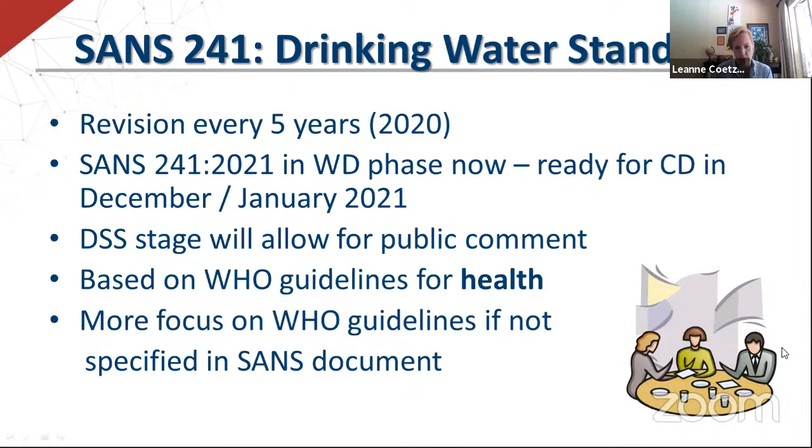As we all know, small water treatment systems are generally higher risk because things go wrong quicker at smaller treatment systems. So this is where you would point out your potential hazards and risks. Based on those risks and hazards, you would draw up a system-specific water quality monitoring program specific to that particular wastewater or drinking water treatment plant.

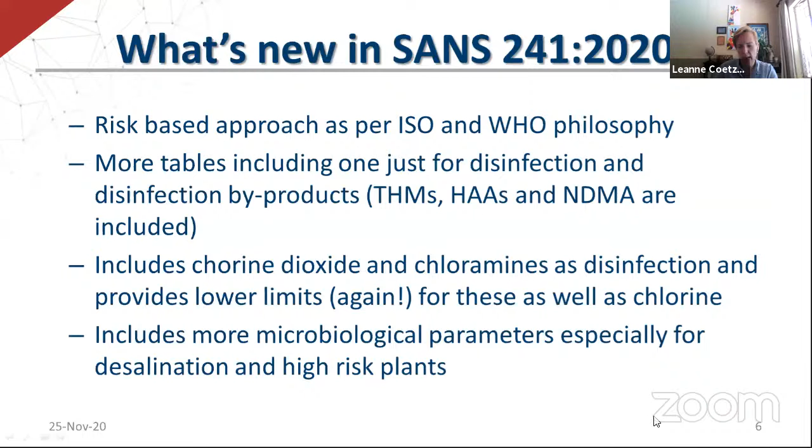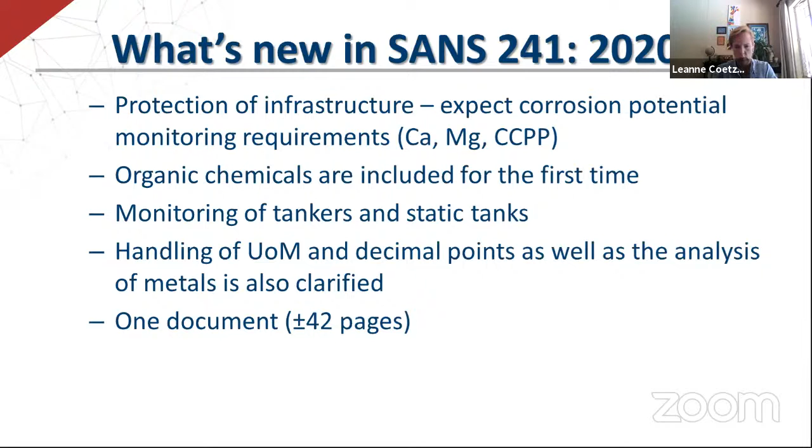So we don't have SANS Part 1 and Part 2 anymore. It's just going to be SANS 241 2021. It's about 42 pages at the moment, but as I said, it's still going to committee draft now, so we will see if it gets longer or shorter.

So in conclusion, I would ask you that when you see the new document, please don't just look at the tables, read the whole document. It has been extensively revised. Some of the people who have worked very hard on this document are in this webinar today, so thank you for them. And please, it's not just only about the tables, it's about the whole document, the whole holistic process.

And when we are ready to give you the draft standard, please make yourselves available for public comment. We will try and put this out on social media and on various websites so that you will be able to know when the draft standard is out for comment. And we would appreciate any comments coming from the public. So with that, I thank you very much.

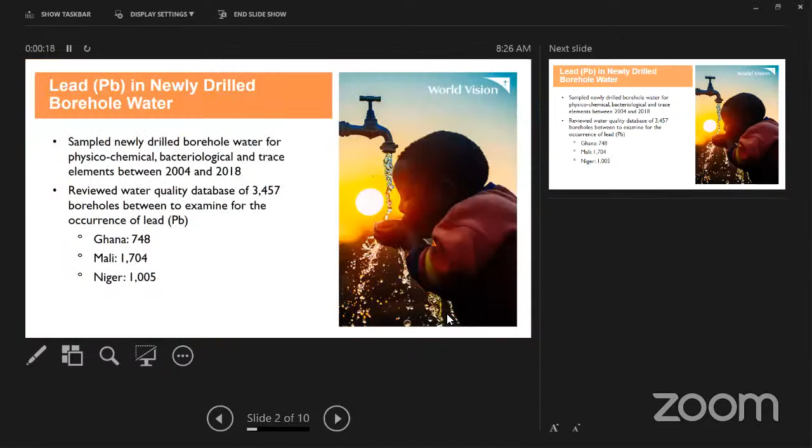In our experience as an NGO, I work for World Vision. We provide water to communities since 2003 as a large program. Today, we are reaching about 50 countries with our business plan, but globally, we are reaching more than 82 countries. But the experience I'm going to share today is about what we did in West Africa region, as West Africa has been the larger geographic area where we work for more than 20 years.

We realized that water quality issues are very critical in the provision of safe water. And because of that, we conducted some water quality analysis, including physical, chemical, bacteriological test, but also trace metal test. We decided to sample our new drilling boreholes between 2004 and 2018 to ascertain that water we provide to communities are of good quality.

It happened that 2 years ago, we started reviewing our water quality database for about 3,400 wells to ascertain that we are not having some occurrence of lead. We tested samples in Ghana, Mali, and Niger.

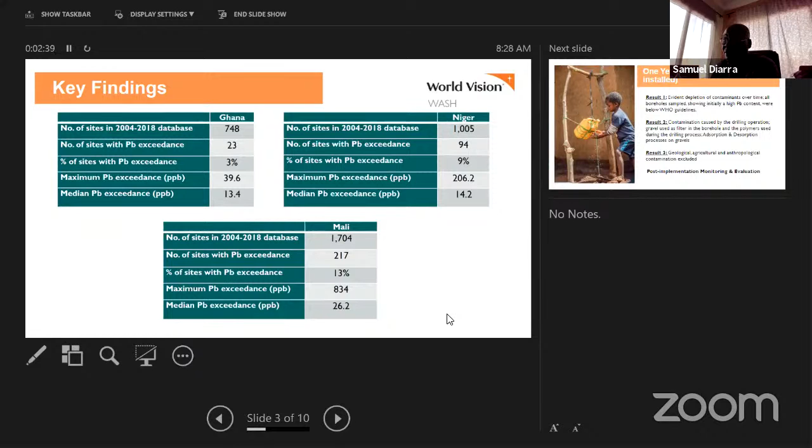Then when we realized that those boreholes have exceedances, we decided actually to not equip the wells. And we decided to conduct a post-drilling monitoring 1 year after. And we realized that most of the boreholes have some kind of depletion in the content of lead. And this was after a 12 months period.

We did some additional investigation in the field, and that investigation pointed out that the contamination is caused by drilling operation, mainly gravel used as filters, but also additives like polymers during the drilling process. The gravel issue is about adsorption and desorption process.

Mr. Diarra, you are on mute.

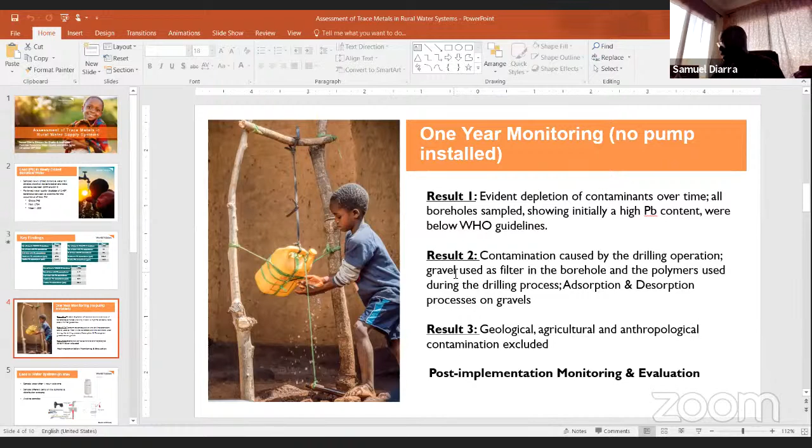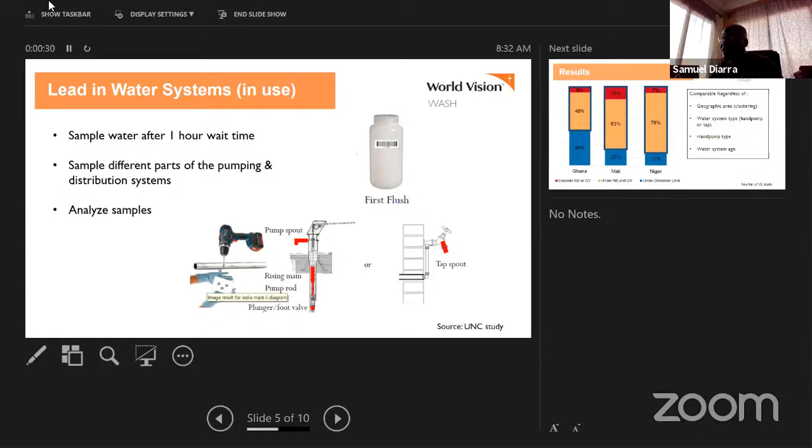With that said, we realized as well that there is also some component of lead coming out of the borehole after installing the pumping system, whether hand pump or submersible pump. We tested all of them by sampling water with a 1 hour waiting time before sampling, and we also sampled different parts of the pumping and distribution system to analyze them. The result came out like this.

Then the study we conducted with UNC helped us understand some of the root causes. The first is about the drilling input, gravel, polymer, and any other material used to construct the facility. Why is that? It is about the quality of gravel, especially gravel collected from the riverbed, which is highly producing lead.

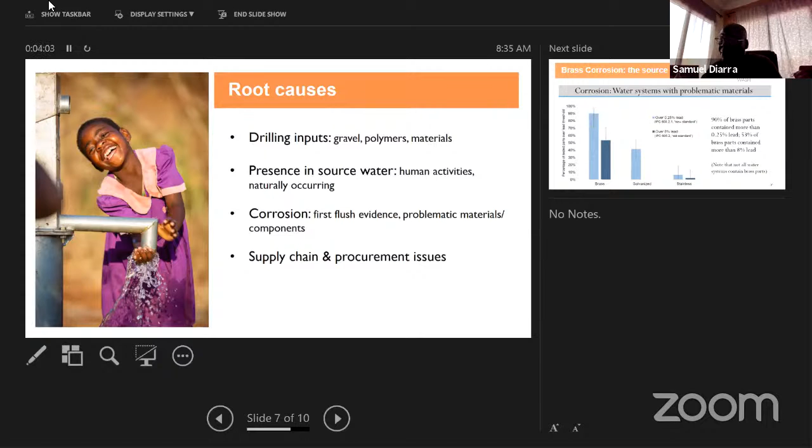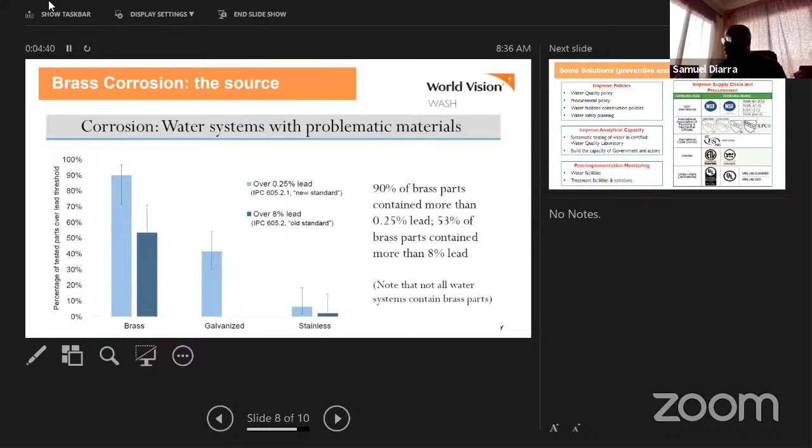Some solutions we want to suggest to this group: ensure that we improve our water quality policies to include quality checking for new boreholes, but also for existing boreholes, to ensure that trace metals are not occurring as a result of corrosion or any material or product used for drilling. We need also to improve our procurement policies to ensure that quality, certified materials are used in water facility construction. There is another component of water facility construction policies to ensure that those working in that field use certified materials and certified additives.

The last component is about water safety planning. We know that there are some environmental contaminations that can happen. We don't have at this level all the information about the environmental contamination, as our geographic area didn't have any, but it is a possibility.

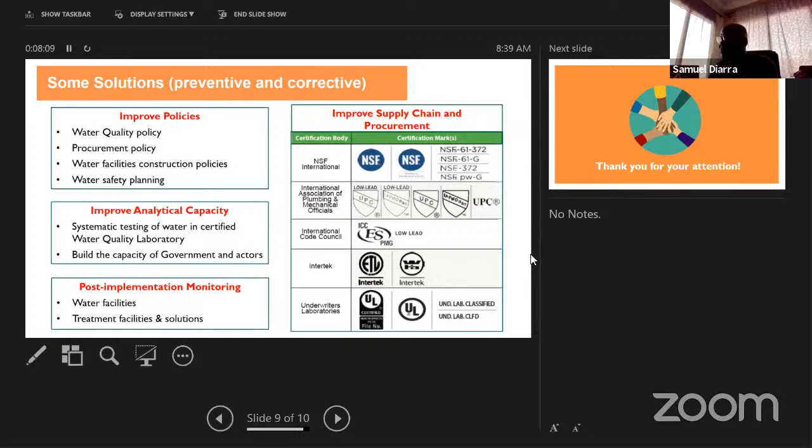This is what I wanted to share today. I'm happy to answer your questions. Thank you.

Mr. Samuel Diarra, thank you very much for that presentation and for sharing valuable lessons from West Africa on how you manage water quality, and for stressing the importance of following a water safety planning approach. I liked your second-to-last slide, as it gives us food for thought on how we can strengthen our current standards and water quality policies with regards to managing risks associated with infrastructure and equipment used for water conveyance, or water treatment infrastructure, and their contribution to water quality. So thank you very much for that.

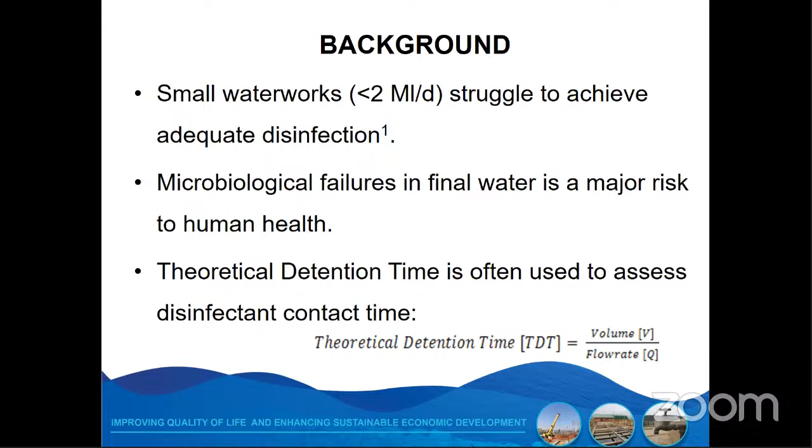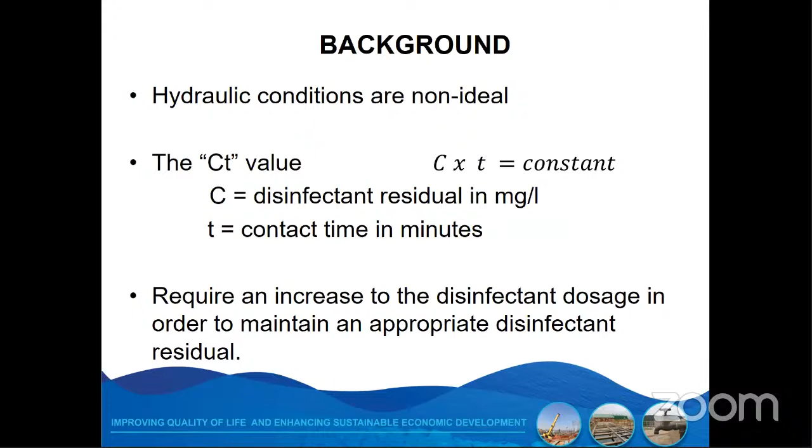But as we are aware, hydraulic conditions are non-ideal. So here we're also looking at the CT value, where C is the disinfectant residual in milligrams per liter required, and T is your contact time in minutes. The CT value shows us that in order to maintain an appropriate disinfectant residual, if you have a shorter contact time, you will now require an increase to the disinfectant dosage in order to maintain that residual.

The baffling factor is a factor used to standardize hydraulic disinfection efficiency, and this factor uses the theoretical detention time. It's determined by using the T10 value, which is the time at which 10% of the given disinfectant is observed at the outlet of the system. We were able to get this value from our testing on the sites. The table below, from the US EPA, shows the various baffling conditions and the related baffling factor, from unbaffled conditions to perfect or plug flow conditions. We used this table to assess the waterworks that were tested.

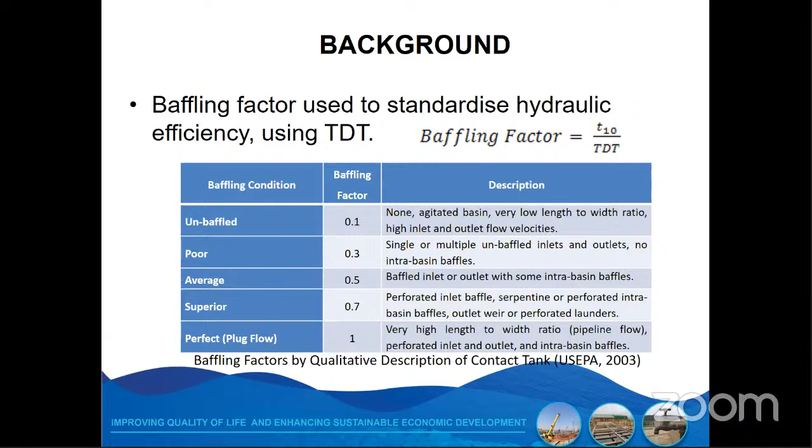When we were doing the site selection for the testing, a number of sites were surveyed, and while a number of them fell below 2 megaliters per day, it was difficult to find sites that fit all of the criteria listed below, particularly sites with distinct contact tanks with different geometries or with existing baffles. Other issues we had will be discussed later on in the presentation.

So we were able to test about 4 sites that had different geometries and were less than 2 megaliters per day, as shown in the table. Site 1 had a circular contact tank with no baffles, which had a top inlet and a bottom outlet. Site 2 had a rectangular tank with a single longitudinal baffle as well as an underflow weir. Site 3 was a rectangular tank with no baffles, and Site 4 also had circular contact tanks. However, these were in series, with tank 1 having a top inlet and bottom outlet, and tank 2 with the bottom inlet, bottom outlet configuration.

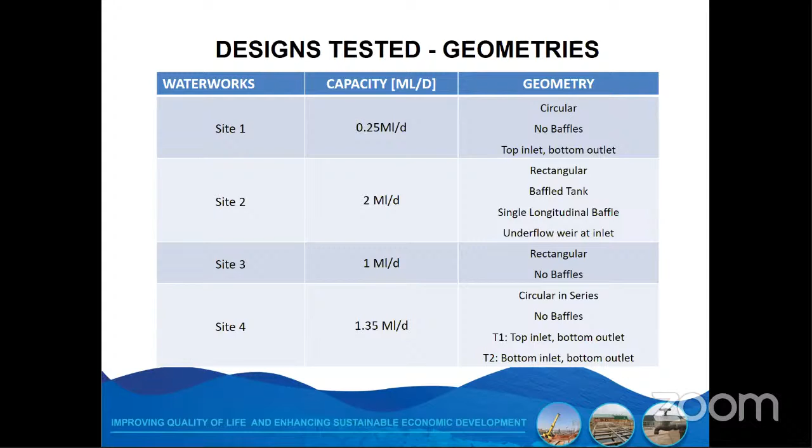The experimental procedure for this research was using the tracer test analysis method. When we first went to site, we took the flow rate measurements, tank dimensions, and site criteria, and then looked at the disinfectant dosing point, where we inputted the tracer in order for measurement at the outlet of the contact tank. Initial tracers used were the fluorescein dye and sodium chloride solution in order to measure conductivity at the outlet.

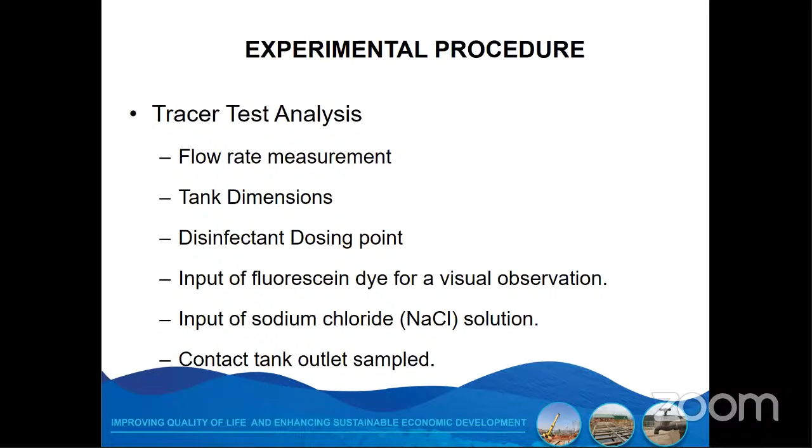So contact tank design 1, I'm sure, is a familiar sight to most of us, the JoJo tank, which is used at quite a few sites as a contact tank unit process. This plant was 0.25 megaliters per day with a single circular tank of 10 cubic meters. The second tank there was just as an overflow, and this tank has no baffles. There's a top inlet where the sodium hypochlorite disinfectant was being dosed.

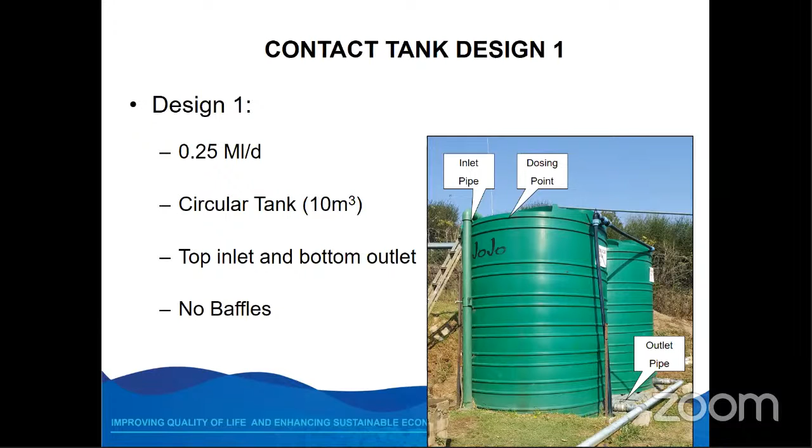Calculations showed that the expected residence time for this plant was 22 minutes. But based on our testing, we found the tracer showed at the outlet after only 2 minutes, indicating severe inefficiency in the system. The baffling factor was then determined based on our results as 0.23, which on the US EPA table shows us it falls between 0.1, unbaffled conditions, and 0.3, poor conditions of mixing.

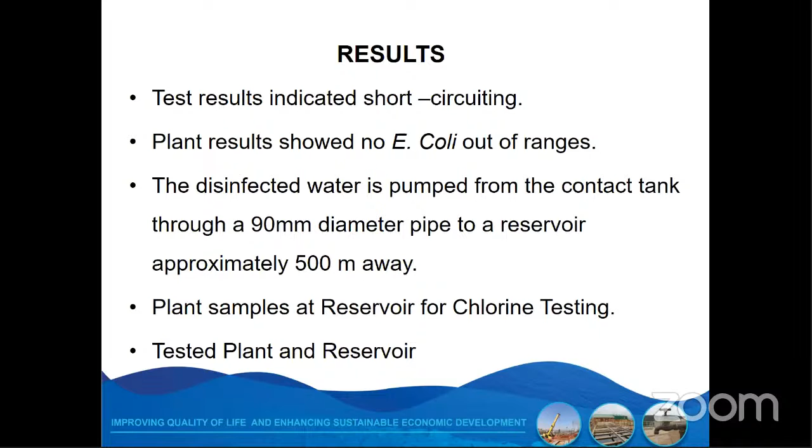So the test results indicated severe short circuiting, but when we looked at the historical data at the plant, we found that there were no E. coli out of ranges. So when we looked at it a bit further, we found that the final water is pumped from the water treatment works to a reservoir approximately half a kilometer away, and that is where the samples are taken for compliance monitoring. We then repeated the test for both the plant and the reservoir. We found that from the plant to the reservoir, there was in fact a further 10 to 15 minutes contact time and mixing in this pipeline, which then allowed the plant to achieve this compliance.

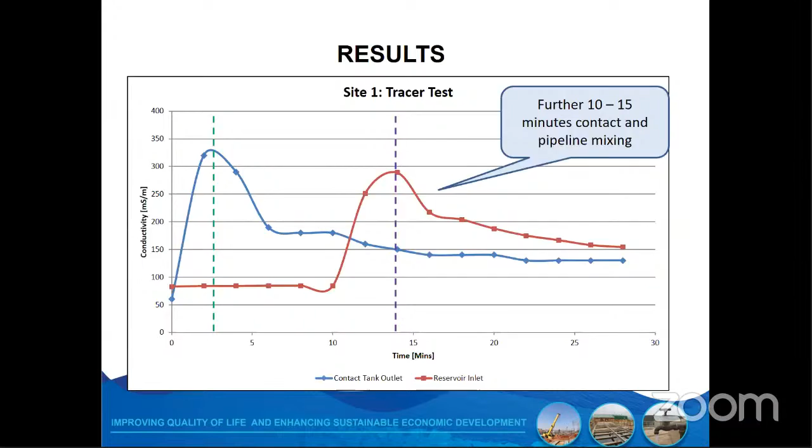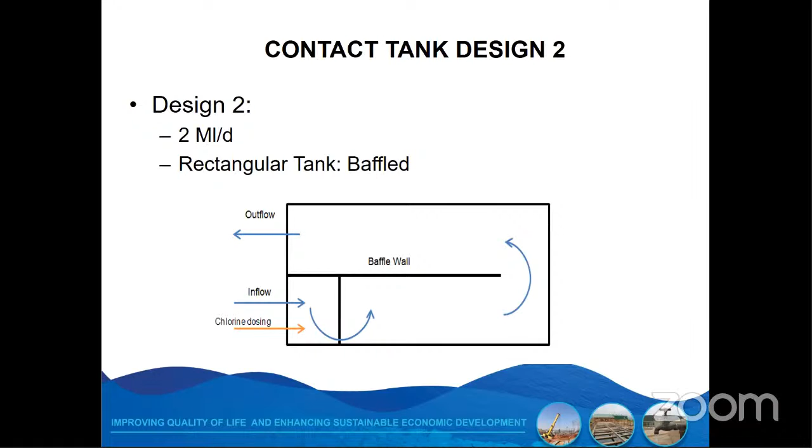The second contact tank design we found was at a site of 2 megaliters per day, a rectangular tank with a single longitudinal baffle, as shown in the photo below. So the flow was in at the bottom left, flowed around, and then at the outlet point, samples were taken for conductivity measurement.

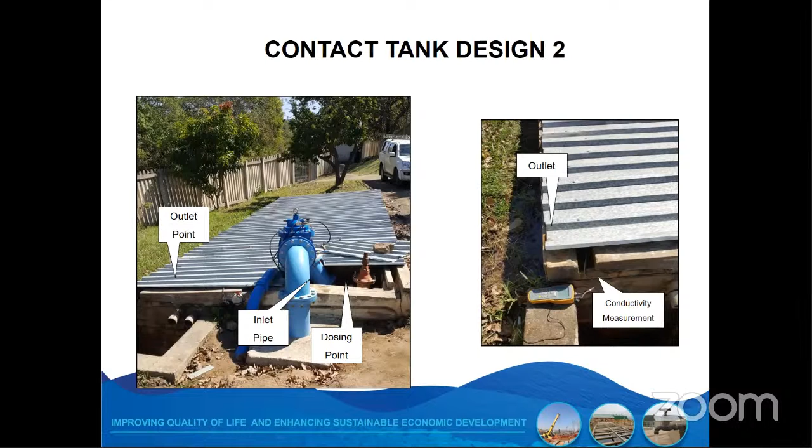Here, the theoretical residence time was approximately 21 minutes. However, we found that the actual residence time in the tank was 11 minutes, showing the inefficiencies in this tank as well. So although there was a single baffle and we were expecting a higher baffling factor, the results still show poor conditions at the site.

From here, the water is pumped to a reservoir which is approximately 2 kilometers away, and the tracer test was repeated to determine the spike at the inlet to the reservoir. We found another contact time of approximately 113 minutes prior to the reservoir. For this site, we were unable to get historical data in order to assess compliance.

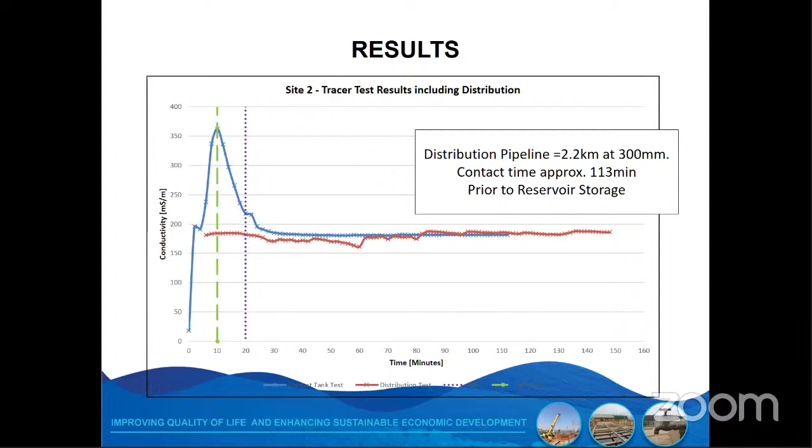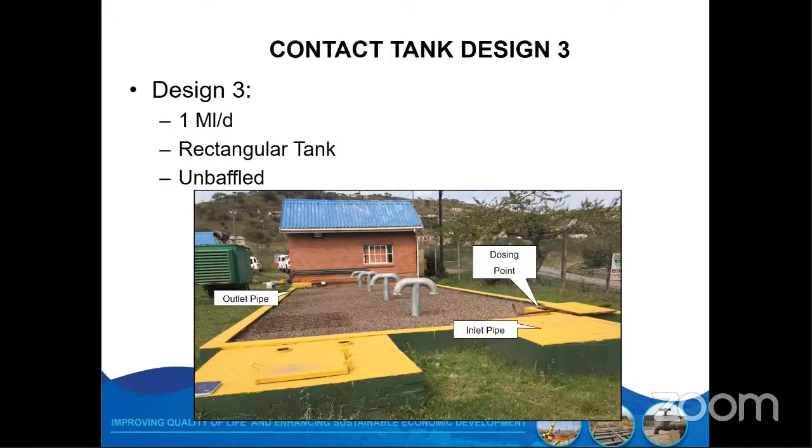The results showed an expected residence time of 246 minutes, approximately 4 hours. However, when we did the tracer test, we found the actual residence time was between 10 to 14 minutes. So at this site, there was severe short circuiting, and the baffling factor was determined to be 0.1, unbaffled conditions.

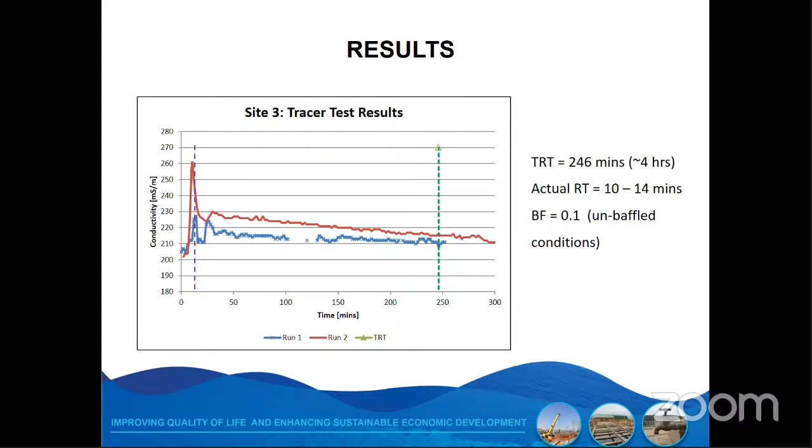Historical results available at the plant showed that chlorine residuals were within range, and there were a few E. coli detections over the 2 years of data provided, which were less than 2 CFU per 100 ml.

This plant also pumps to an offsite reservoir. Unfortunately, we had some issues due to access, but there's a 1.8 kilometer pipeline, which should provide approximately 15 minutes of extra contact time.

Design 4 was a plant that was 1.35 megaliters per day, which again used JoJo tanks as the contact tank unit process. Here, there were 2 tanks connected in series, and the disinfectant was dosed in line prior to contact tank 1.

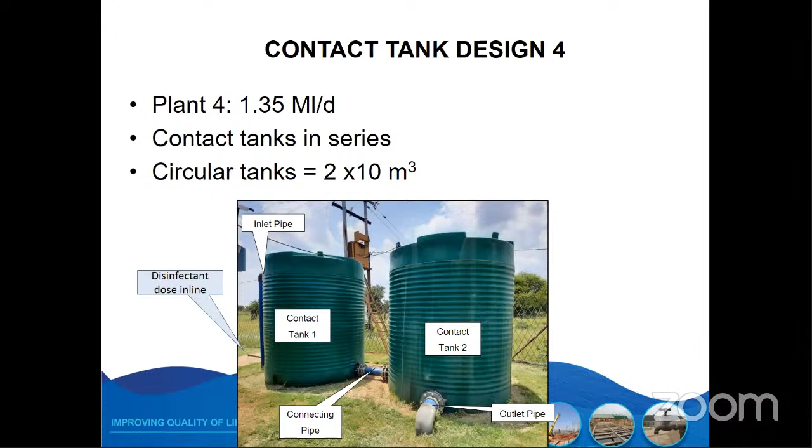The theoretical residence time for this system was 37 minutes. However, based on the tracer test, we found the actual residence time between 16 to 18 minutes, again showing the inefficiencies of the system despite having the second tank connected. The baffling factor was then calculated to be 0.19, showing unbaffled conditions.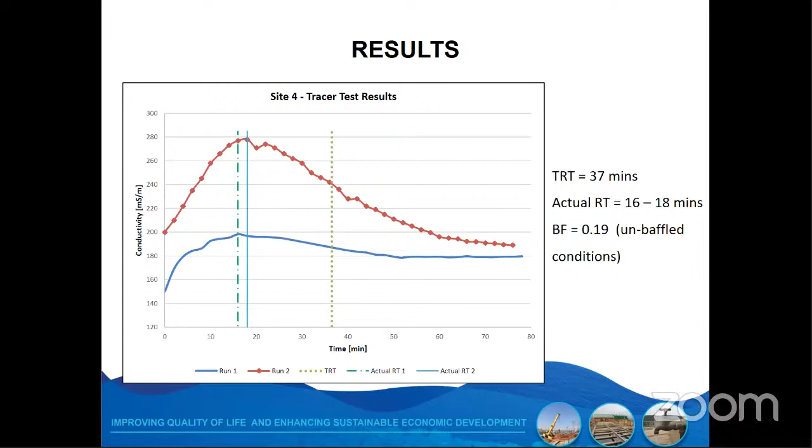At this site, there was no historical data available, and as mentioned in these sites, there was monitoring equipment on site, but there were no quality records available for us to determine compliance. From this site, it was pumped to a distribution reservoir approximately 4 kilometers away, and again we could not access this or conduct testing to determine the contact time.

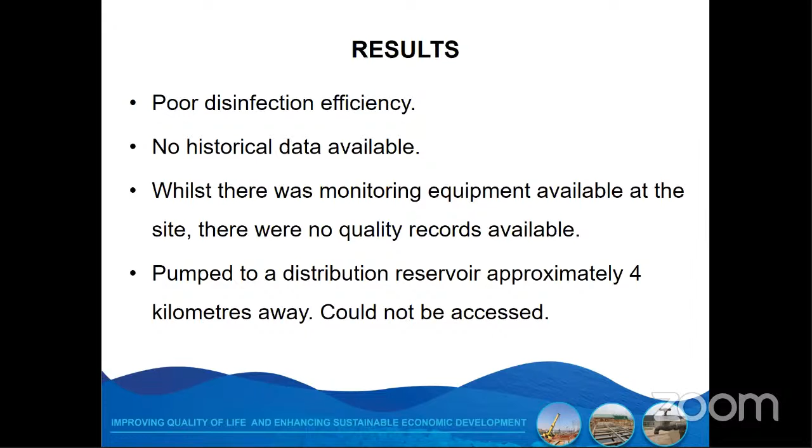Results for the different geometries tested showed that the difference between the actual residence time compared to the theoretical time showed high inefficiencies in all systems. Having a single baffle did not improve the mixing at site 2, as there was still severe short circuiting. The baffling factors assessed for all showed between unbaffled to poor mixing conditions.

While testing on live sites, we experienced a number of challenges, or lessons learned. We initially used fluorescein dye for the tracer test and added just a few grams. Unfortunately, this resulted in the off-site reservoir turning bright green, and we received a few customer complaints. So that was not done for any future testing.

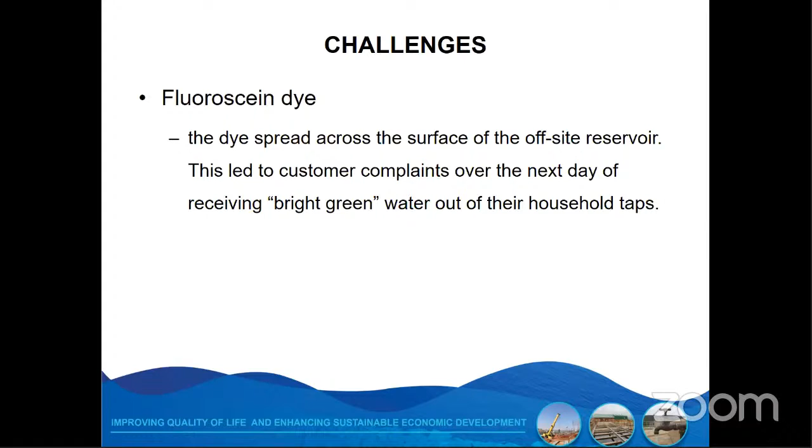Pre-planning must be done before any tracer tests and analysis, specifically if there are level controls on the pumps on site. A number of sites have level control based on the on-site or off-site reservoirs, and if they're switching off and on, this results in inaccuracies in the test results.

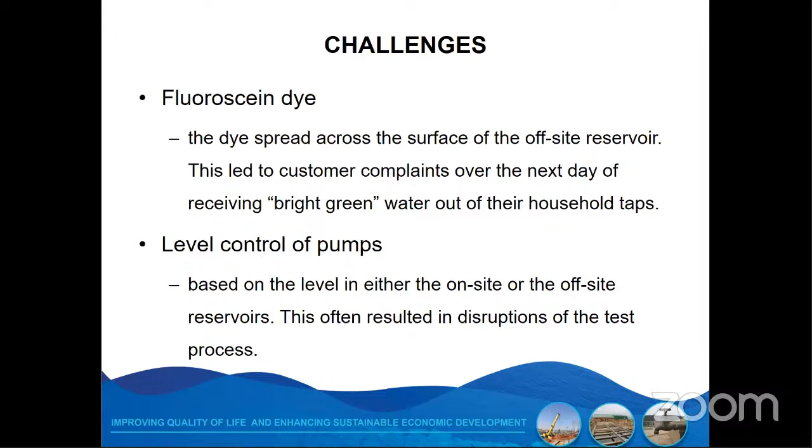One of the major challenges we experienced was finding sites that had suitable sampling points. As mentioned earlier, we surveyed a large number of waterworks below 2 megaliters per day, but couldn't conduct our testing because we didn't have suitable access points, either for adding the tracer or for conducting sampling at the outlet. Quite a number of the waterworks also dosed the disinfectant at the clarified buffer tank, normally prior to a pressure filtration system.

Lack of metering was another challenge experienced, where plants either did not have inflow or outflow meters installed, or sites that did have flow meters were not operational.

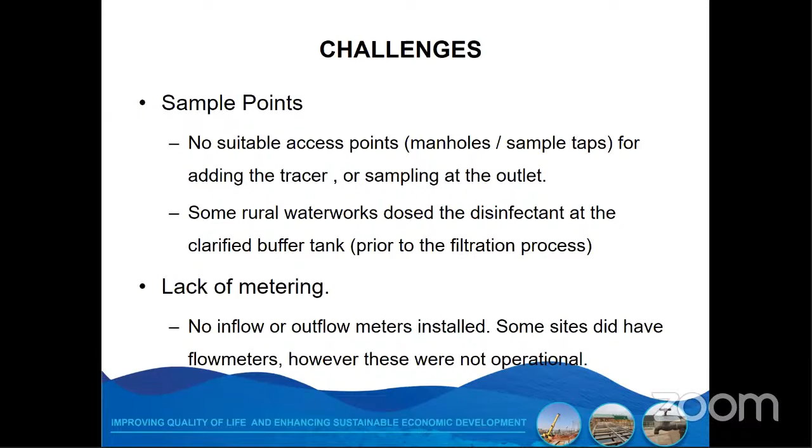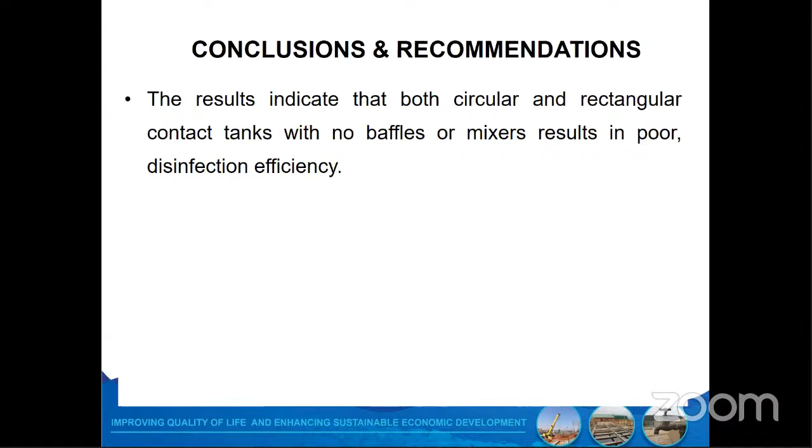Some conclusions from our research project show that circular and rectangular tanks with no baffles have high inefficiencies in terms of hydraulic disinfection. However, the negative impact to consumers was reduced by the presence of pipeline or storage reservoirs before distribution. But we'd like to emphasize that this does not negate the need for accurate design of your chlorine contact tanks.

Because when you're looking at the CT concept, if you're improving the contact time, you can optimize your disinfectant dosage. So you don't want to overdose your disinfectant, which could cause possible byproducts, as well as wasting chemicals, and this is an unnecessary cost.

When assessing the water treatment system for troubleshooting, you should look at the system holistically when considering the disinfection process. Plant designers should consider residence time and allow for variable flow considerations. Also consider the baffles, the number and orientation of the baffles, in order to maximize contact time at design flow.

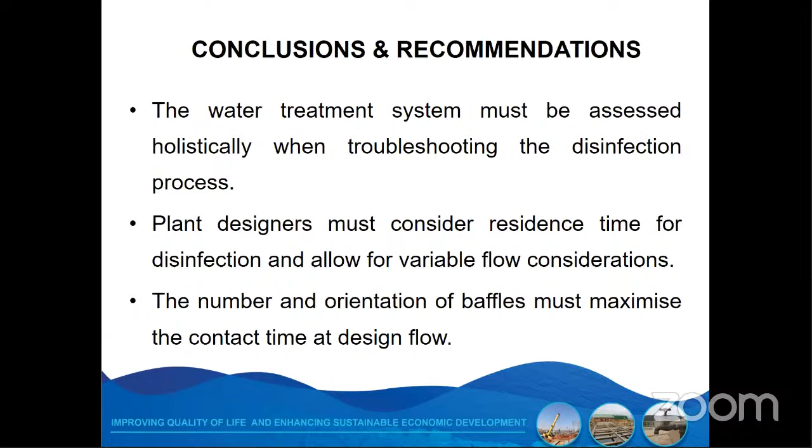Designs should include sampling points. We also recommend computational fluid dynamic modeling to validate hydraulics, which could assist in improving the designs of contact tanks.

In terms of recommendations, we'd like to have further investigations on sites, adding in modifications such as extra baffles or mixers, split inlets, to see if we can improve the contact time at these sites.

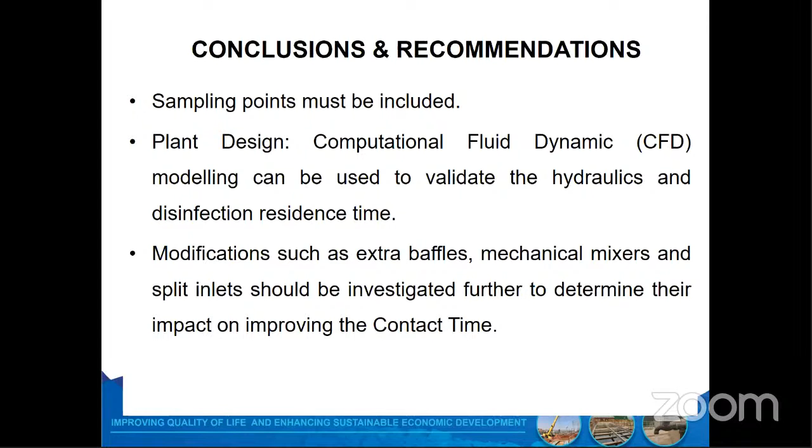We were able to improve the baffling factor from 0.22 to 0.52, which took it from poor mixing to at least average mixing. We'd like to continue this work and see how much further we can improve the hydraulic efficiencies on sites.

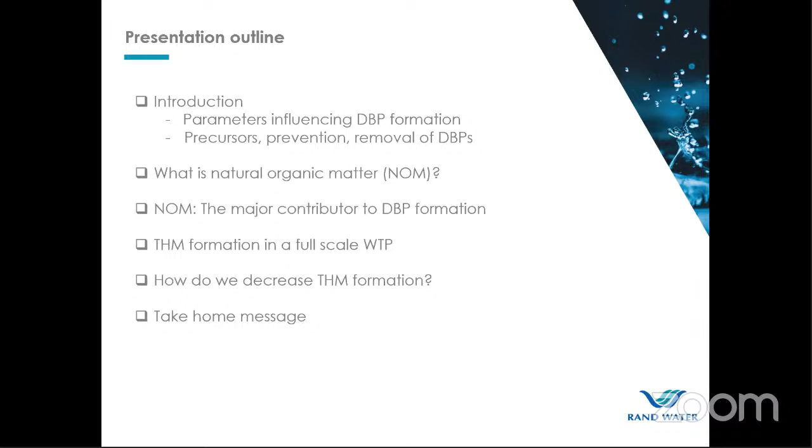Parameters influencing disinfection byproduct formation, the precursors, prevention and removal of DBPs. More about natural organic matter, NOM, being the major contributor to DBP formation, typical THM formation in a full scale water treatment plant, how we decrease THM formation without compromising disinfection efficiency, and then the take home.

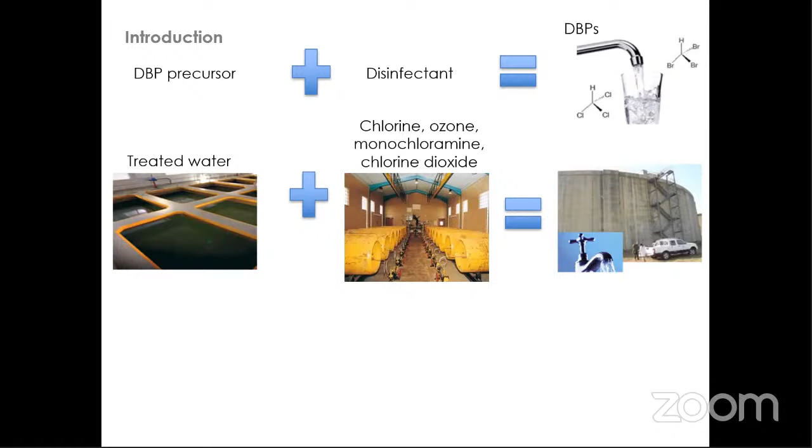We know that disinfection byproduct precursors within the treated water react with the disinfectant, and DBPs are formed in the final treated water. Because we mainly use chlorination in South Africa for disinfection, we focus on the DBPs that form, which are mostly halogenated disinfection byproducts like trihalomethanes and haloacetic acids.

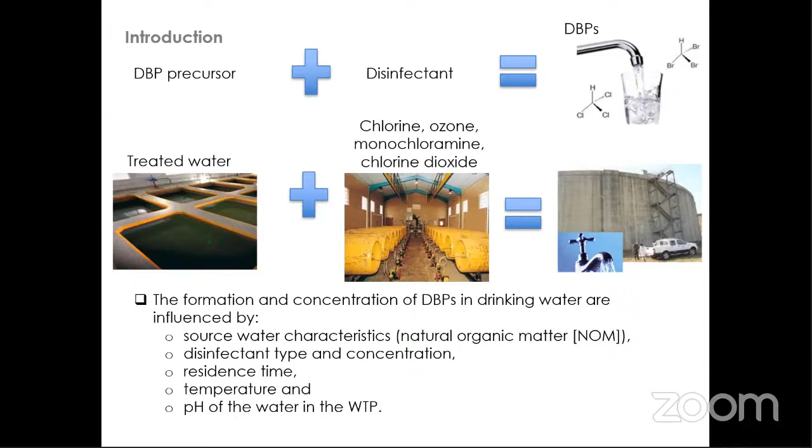The formation and concentration of DBPs in drinking water are influenced by source water characteristics, NOM, disinfectant type, the concentration of the disinfectant, residence time, temperature, and pH of the water. So we have our source water, the precursors within the source water, and then the water that is treated at a water treatment plant. During the disinfection step, the DBPs form.

More than 700 DBPs have been identified to date, due to various disinfectants used, different treatment pathways, and because the source water quality greatly differs. These disinfectant byproducts that form are usually grouped into chemical classes: haloacetonitriles, trihalomethanes, haloacetic acids, NDMA, etc.

In order to prevent the formation of potential carcinogenic DBPs, we can either remove the DBP precursors before disinfection, in other words prevention methods, or we can remove the DBPs after they've formed, removal methods.

What is natural organic matter? NOM is the compound that gives water that brown-yellow color, due to it being mostly humic substances. NOM is not a single compound, but a complex mixture of organic compounds with different structure and characteristics, and its composition differs in various source waters.

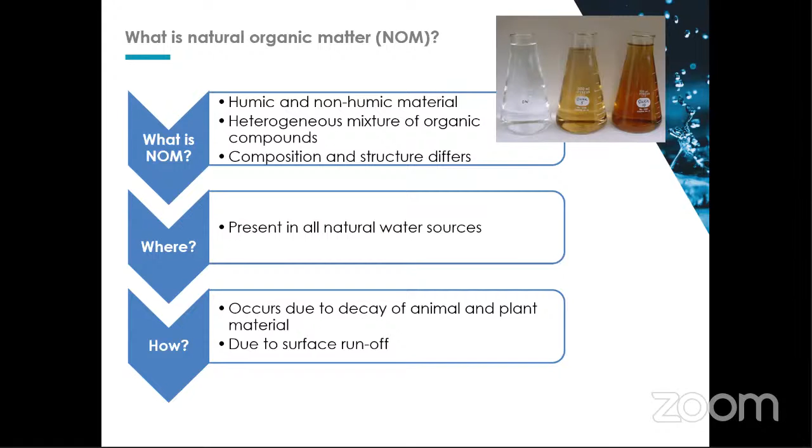The major contributor to disinfection byproduct formation is NOM. If we use a different disinfectant, we will still form DBPs, but a different type, not necessarily THMs. People often ask, why not use a different disinfectant if chlorine causes DBPs? The most important reason we use chlorine is that, yes, it's cheaper, but chlorine also provides a disinfectant residual. So if you have a big distribution network, or water stays in a tank for a long period, chlorine can provide that much needed residual for microbial or pathogen control.

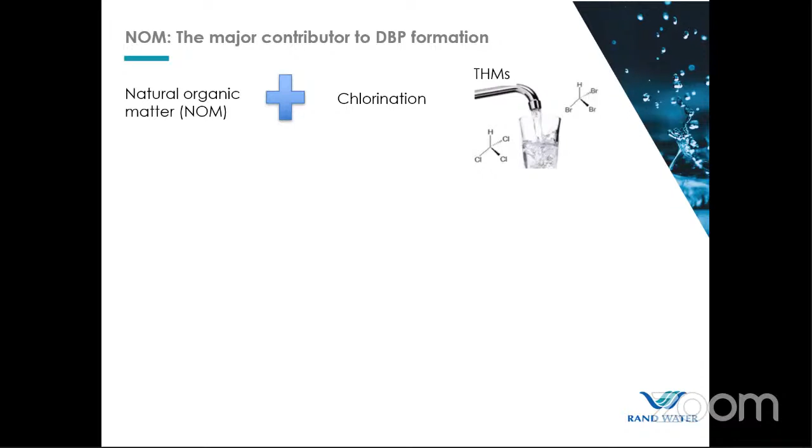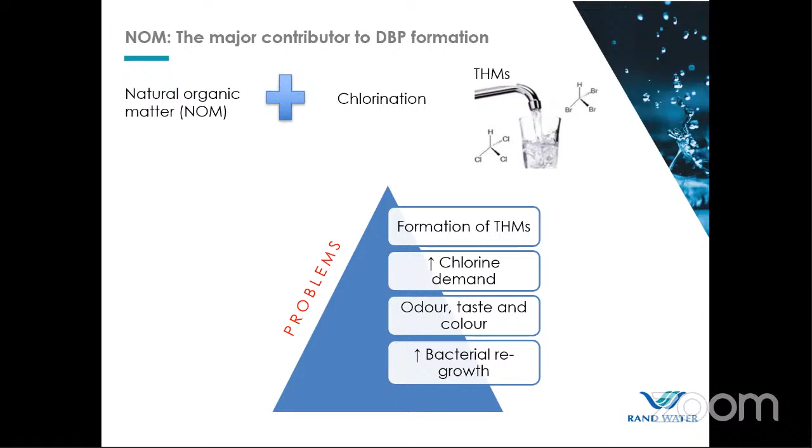The precursor mostly responsible for the formation of THMs and haloacetic acids is NOM. Because we mainly use chlorination in South Africa, we focus more on DBPs formed during chlorination, being THMs and a small amount of haloacetic acids. We also focus on natural organic matter, the main precursor to formation of these halogenated DBPs. So what happens if we do not adequately remove NOM during water treatment? Trihalomethanes are formed in the final water, the water will have increased chlorine demand, odor, taste and color problems might be evident, and insufficient NOM removal can also increase bacterial regrowth within the distribution system.

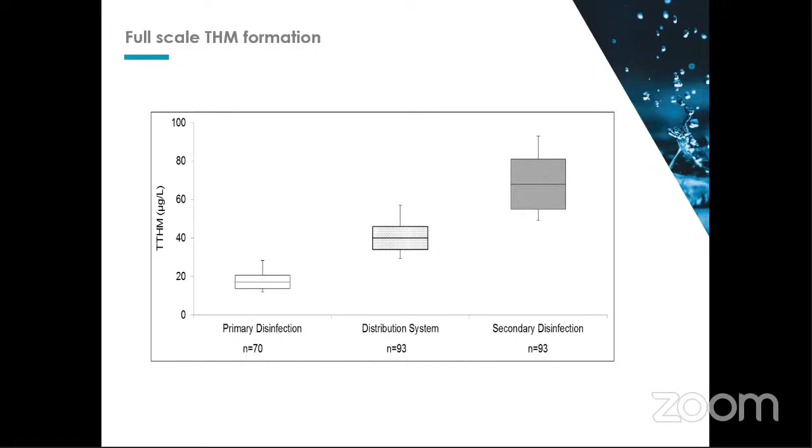This graph is a typical presentation of what happens in the distribution system. We see a clear increase in THM formation, but well below the SANS 241 value. We also see a decrease in free chlorine throughout the distribution system, but this specific plant has an adequate CT value at the primary station for the incoming bacterial load. At secondary disinfection, one wants to maintain this free chlorine residual, achieved by adding ammonia at this specific point. Here we see the THM formed after disinfection is mostly bromodichloromethane and chloroform, and again we see the increase due to longer residence time within the distribution system.

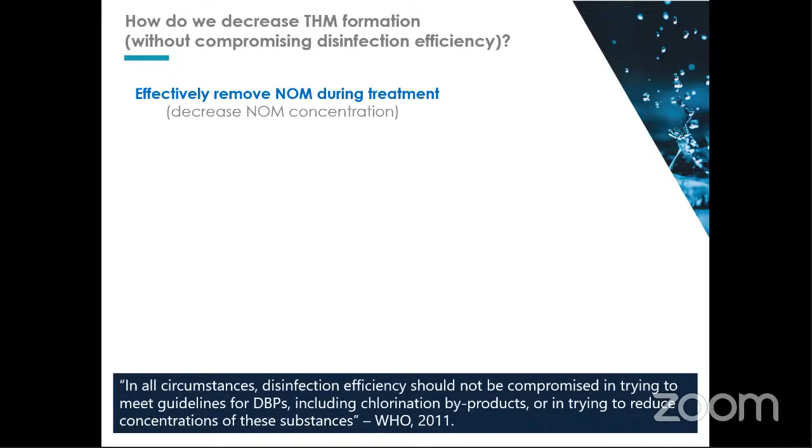But how do we decrease THM formation without compromising disinfection efficiency? It's very important that disinfection efficiency should never be compromised just to meet guideline levels for THMs or when trying to reduce the concentration of DBP compounds. The easiest and most effective way to decrease THM formation is to effectively remove NOM during treatment, or decrease the NOM concentration as much as possible.

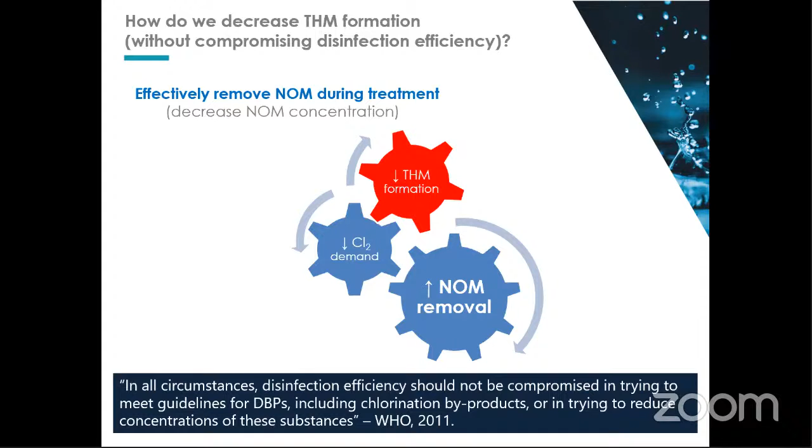If we increase NOM removal during treatment, the chlorine demand of the water will decrease. So we dose less chlorine, and ultimately the THM formation will also decrease. But it's important to remove the NOM fraction that is mostly responsible for THM formation in your specific source water.

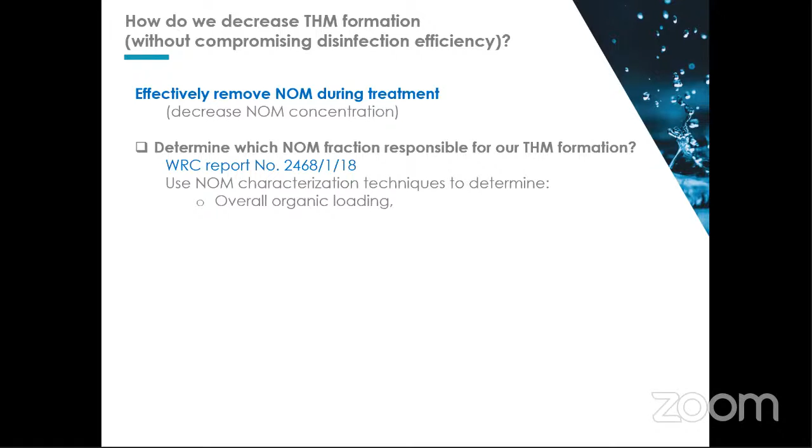First, we determine this problematic NOM fraction mostly responsible for THM formation. We make use of NOM characterization techniques to determine the overall organic loading in the source water, the current NOM removal, which NOM fraction is currently being removed by your treatment process, and the trihalomethane formation potential of the individual NOM fractions.

If we do not have advanced NOM characterization techniques, we can use surrogate NOM parameters like dissolved organic carbon, UV254, and SUVA. DOC gives an indication of the bulk organic content of NOM in a sample. UV254 measures the aromaticity of the NOM. A sample with a high UV254 value indicates NOM with high molecular weight, similar to what HPSEC or molecular size distribution analysis would also tell us.

We can also use SUVA, the specific ultraviolet absorbance, calculated by dividing UV254 by DOC. A SUVA value between 1 and 5 is usually obtained. A high SUVA value, such as 4 or 5, indicates that the NOM is mostly humic and more hydrophobic in character.

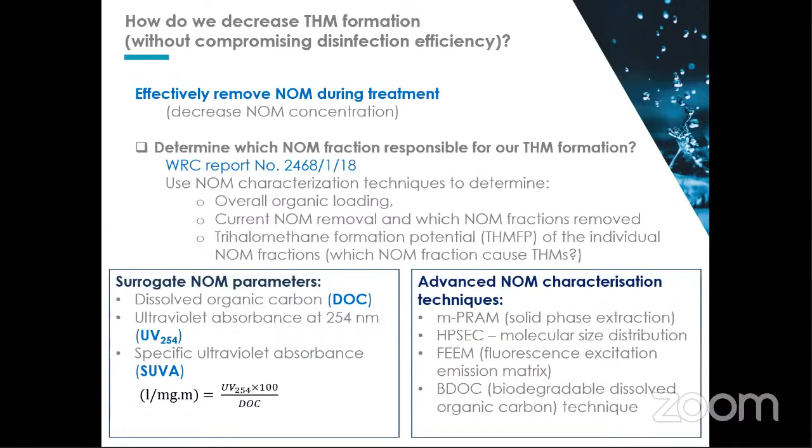The advanced technique, the m-PRAM, will also give us similar information. It divides the NOM into hydrophobic, hydrophilic, or transphilic NOM fractions. After knowing which NOM fraction we need to target, we can focus on the appropriate treatment process or treatment technology.

A previous WRC study compared different treatment technologies. They used the exact same treatment technology in the lab on different source waters sampled throughout South Africa, and found that not all treatment technologies perform the same. It greatly depends on your specific surface water, because the NOM concentration and composition differs in various geographical areas, and NOM character might also change seasonally.

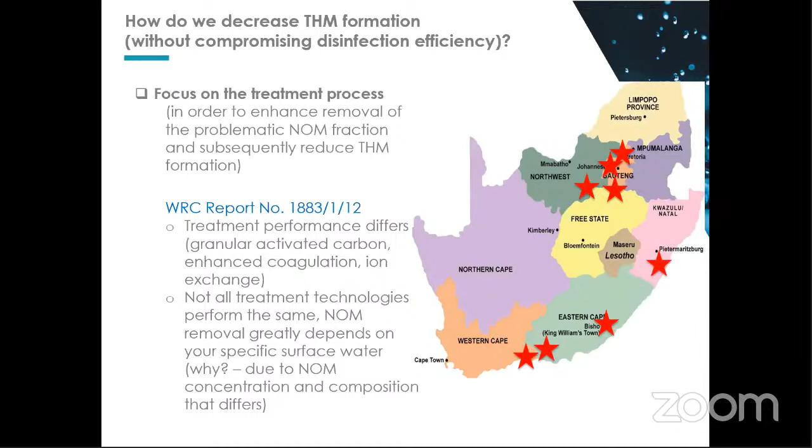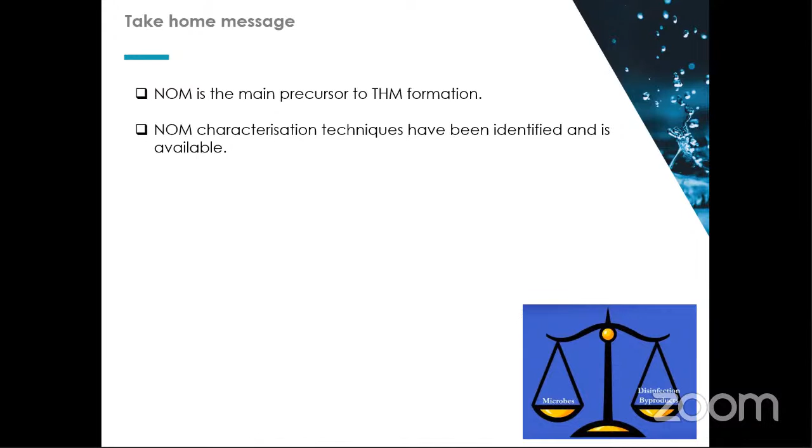Take home message: NOM is the main precursor to THM formation. NOM characterization techniques have been identified and are available. Before optimizing an existing water treatment process, it's vital to focus on the removal of the specific or problematic NOM fraction in order to reduce THM formation.

Not all organic compounds will react the same way with a disinfectant to form DBPs, since the character of NOM differs—its molecular weight or hydrophobicity differs. Also, the concentration of NOM greatly affects the disinfection byproduct formed and the amount of DBP formed. So it's very important to investigate and determine the character of NOM within the specific source water you are treating.

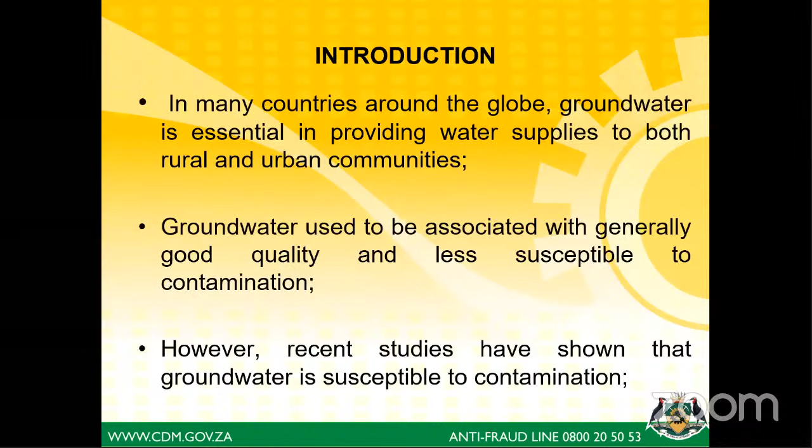Capricorn District Municipality is a semi-arid region in the country where the provision of safe drinking water is inadequate, so groundwater is the major source of drinking water in the district. Roughly about 80% of the population in the district receive drinking water using groundwater sources. We did not include the local municipality of Polokwane in the presentation, as they get mainly bulk water from Lepelle Northern Waters. The results here will be from Lepelle Nkumpi local municipality, Molemole local municipality, as well as Blouberg.

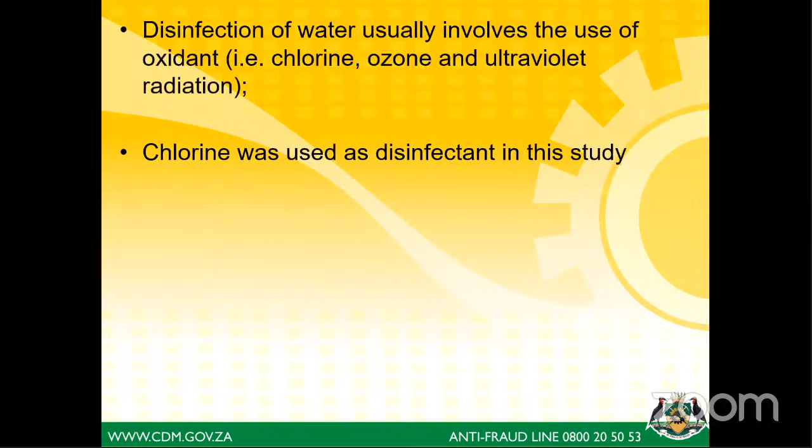For the microbial quality of drinking water, normally total coliform and E. coli are used as indicators for pollution. These two microbes can be chemically deactivated using disinfection processes. Disinfection, as already alluded to by the previous speakers, includes the use of oxidants like chlorine, ozone, and ultraviolet, together with chloramines and chlorine dioxide, which is the most frequently used disinfectant. For this study, chlorine was used as the disinfectant.

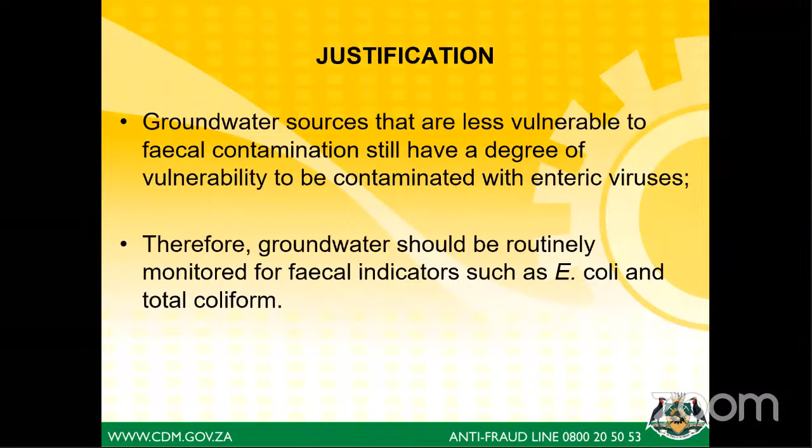Under the justification, groundwater sources that are less vulnerable to fecal contamination still have a degree of vulnerability to contamination with enteric viruses. Therefore, groundwater should be routinely monitored for fecal indicators such as E. coli and total coliform. The aim of the study was to assess the water quality, in this instance the borehole, in terms of microbial contamination as well as turbidity.

We included turbidity because studies have shown that turbidity has a direct relation with disinfection processes—the higher the turbidity, the less efficient the disinfection. So we also need to implement disinfection processes during water purification. In some instances, in our municipality, we use package plants where we have introduced reverse osmosis, which can take out microbials during purification.

We also have chlorine at the reservoirs. We chlorinate at the reservoirs, and in some instances we chlorinate at the borehole.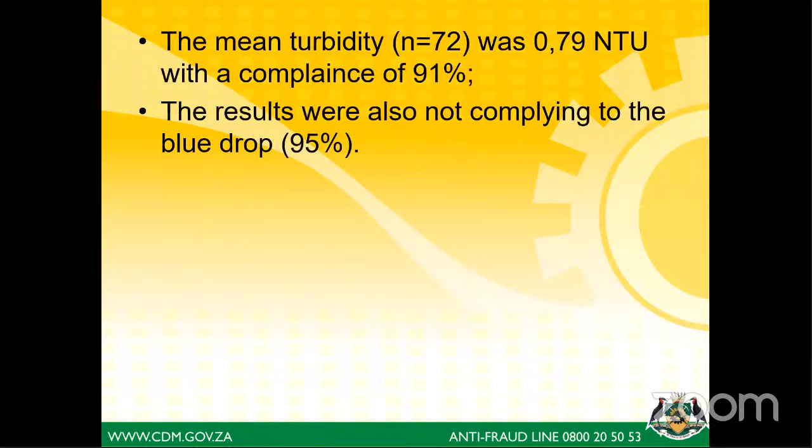We found in some instances where we are not disinfecting at the reservoir, we are disinfecting inline from the borehole. The turbidity is a bit higher, hence the compliance was low.

A lesson from the study: boreholes that are less vulnerable to fecal contamination still recorded high microbial contamination. In one of our local municipalities, Blouberg, which is in the far north, there isn't much activity. We don't even have a wastewater treatment plant at some sites, but still some of the samples recorded high microbial contamination.

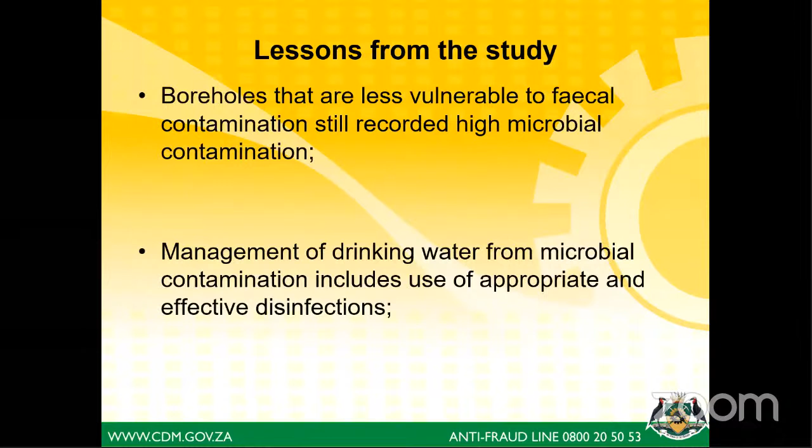The management of drinking water for microbial contamination will include the use of appropriate and effective disinfection. So we are saying we must not have a one-fit-all system. We need to do individual assessment of our water supply to make sure we are using appropriate and effective disinfection.

Also, we need to take care of our distribution system. We need to implement regular cleaning of reservoirs because the area is semi-arid and hot, so algae regrowth because of the heat might be high. We also need qualified personnel for routine verification of water quality.

As I mentioned during the WASH presentation, in Africa we have a big challenge with capacity. Even at municipal level we are experiencing that challenge because we don't have enough trained people to look after our infrastructure and systems. So we need to measure residual chlorine frequently, and we did see that high turbidity values interfere with disinfection of the water supply.

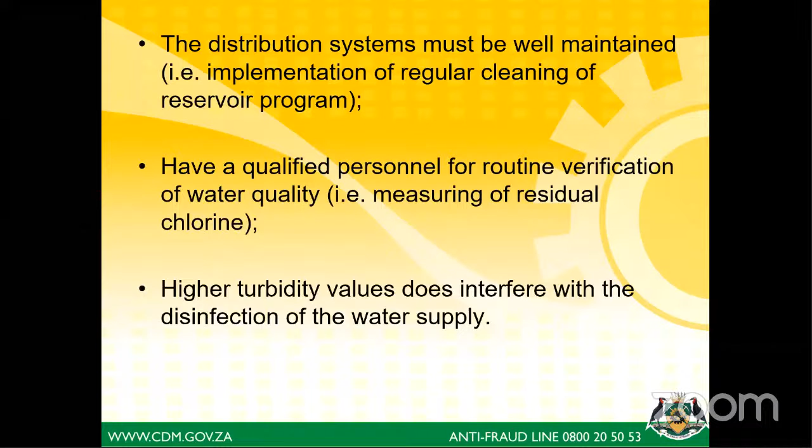The intervention to manage microbial contamination of the water: we need to install some pre-filtration to remove silt from the borehole before implementing the disinfection product, to improve microbial water quality. We also need to do operational monitoring of factors that affect our disinfection process, such as temperature, turbidity, and pH. This needs to be monitored regularly.

We also need to improve maintenance of the residual disinfectant in the distribution system to reduce regrowth of bacteria. We need a program that ensures responsible personnel are trained and certified, because currently some of our process controllers are not certified with the Department of Water and Sanitation. Training can include in-house training and mentoring programs, on-the-job experience, water association training courses, seminars and conferences, etc.

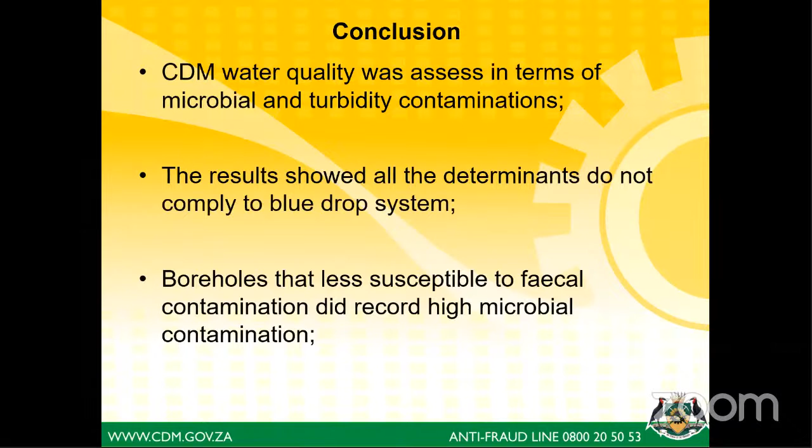In conclusion, the CDM water quality was assessed in terms of microbial and turbidity contaminants. The results show that all the determinants do not comply with the blue drop system. We have also seen that boreholes less susceptible to fecal contamination did record high microbial contamination.

Microbial contamination in some instances was reduced in areas where the cleaning of reservoir program was in place. We also need to fill vacant positions with qualified personnel. I would just like to thank Capricorn District Municipality for providing the environment for the study. Thank you.

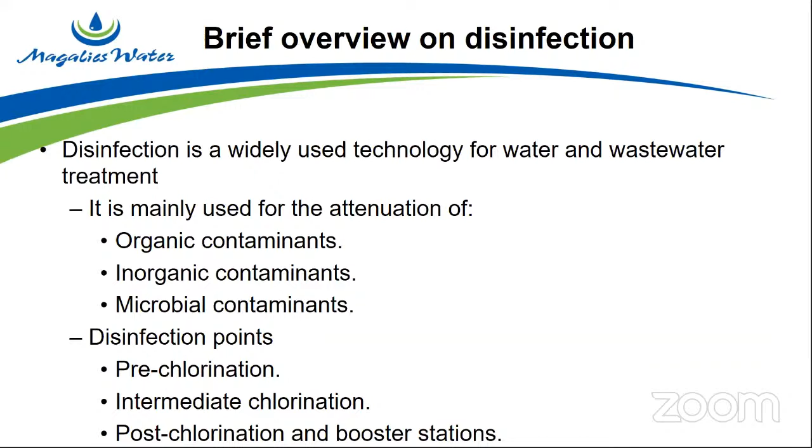Within our water purification plants, we put disinfection at different treatment points or unit processes. We have pre-oxidation to remove some of the incoming contaminants that might affect water quality, intermediate chlorination to remove residuals from pre-chlorination, and post-chlorination and booster stations to ensure that the water dispatched to different end-use points is free from contaminants. So that's what we do.

These are symptoms of upstream activities such as wastewater treatment processes, agricultural activities, urban runoffs, and other catchment activities. We as the downstream people suffer the upstream consequences—these are the symptoms. You can imagine the type of treatment we need to put in place to ensure the water dispatched to end users complies with specifications and regulatory requirements.

This water in the dam is rich in algae, chlorophyll, total organic carbon, and microbial contaminants. Mainly because most of our wastewater treatment plants, when we did our catchment water quality monitoring, we realized they are releasing water with high microbial load, and we as the downstream people suffer from that consequence.

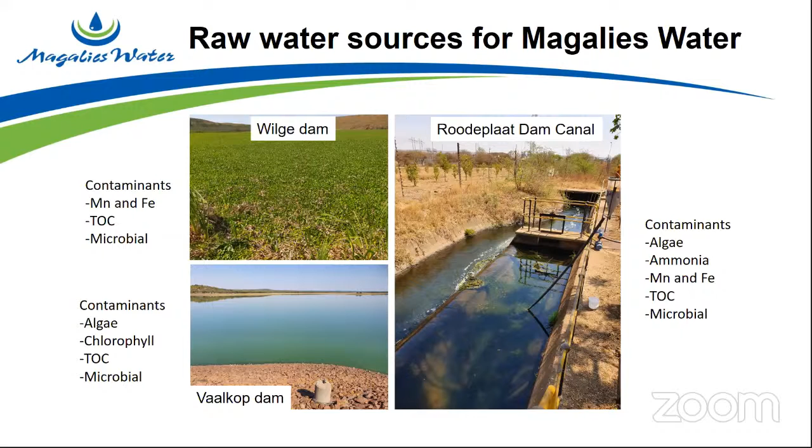This picture shows that the treatability index of our raw water is quite high, and you need a lot of disinfectants to remove contaminants like ammonia, which is very problematic. We also tried breakpoint chlorination, balancing it at an 8:1 ratio, meaning the treatment cost required to bring water to the required standard is quite high. So as downstream people, we suffer a lot.

In certain instances, we had a situation where you put chlorine for pre-oxidation, and when you monitor it after chemical dosing, you find the chlorine is gone. Then after the DAF unit, the dissolved air flotation system, you realize the chlorine is back in the system—meaning some compound is consuming the available chlorine, then after a short time releasing it back. These compounds give us false chlorine figures, and we at times end up overdosing or underdosing. If we can identify these compounds, it might be quite important to regulate that.

Then emerging contaminants—I think this is one of the topical issues globally. Everyone is researching emerging contaminants, trying to find solutions to remove them, their contribution to chlorine demand, and all that, along with evolving contaminants.

Examples, we have the ARGs and all that. So those are the compounds that can contribute to false chlorine demands, and some of the challenges that we experience within Magalies Water. One of the topical challenges that we experience in South Africa, to be general, is algal contamination. We have a lot of algae floating. You saw the Vaalkop Dam having high concentration. The water is green, essentially.

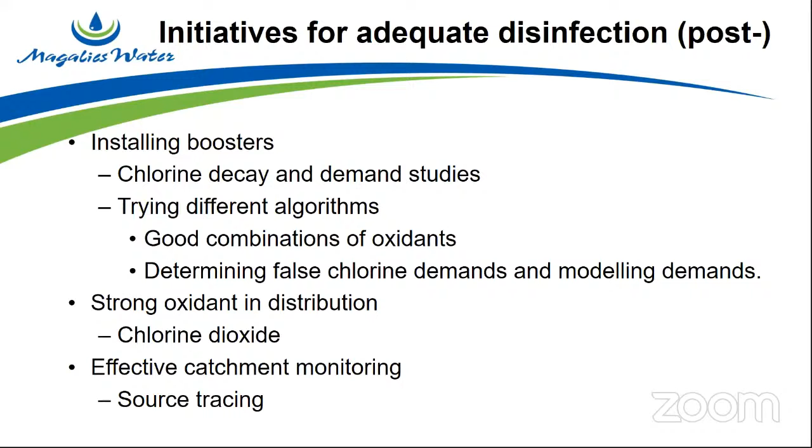And lastly, checking the catchment to identify the culprits within the catchment and the type of contaminants that you should expect downstream when you do your water purification. If you have an effective catchment monitoring strategy, it will really help you a lot in ensuring that you put the right chemicals in place and to ensure that you don't have water purification challenges as you purify the water and distribute it to different end users.

We have one plant in Cullinan, the smallest water purification plant within Magalies Water. For pre-oxidation we use liquid chlorine, and for post-chlorination we also use liquid chlorine. But because we have seasonal challenges, such as high levels of manganese that come on a seasonal basis, mainly during summer, we get high manganese concentration. So we always switch to chlorine dioxide, and we do post-chlorination with liquid chlorine.

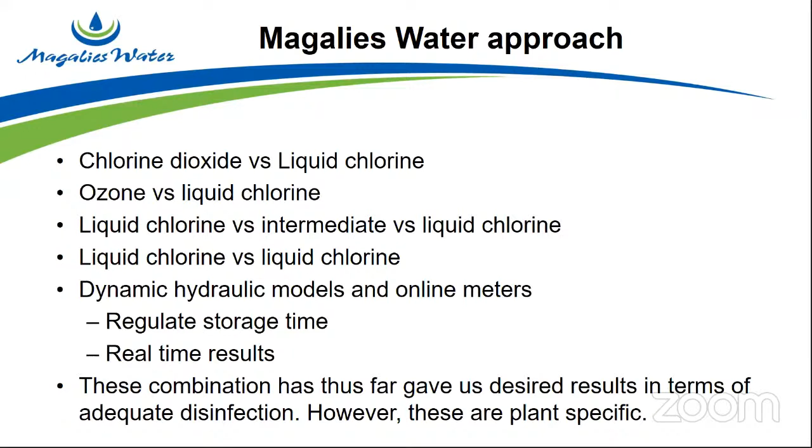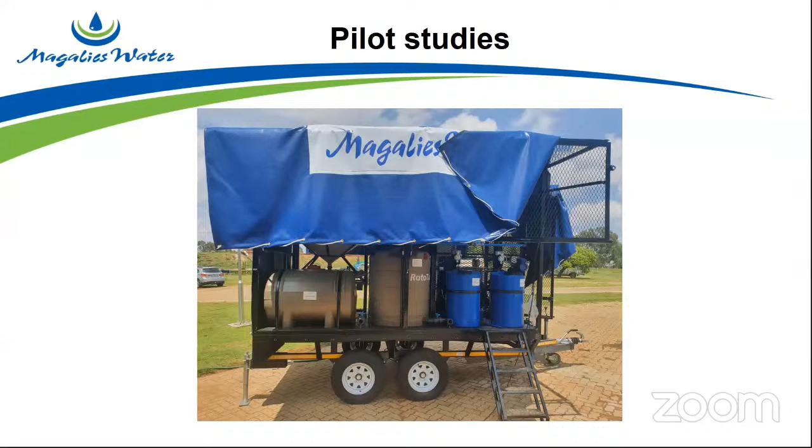We don't have much challenge in terms of disinfection within our distribution networks. Mainly to achieve that, we have a pilot plant where we subject those chemicals and combinations before we take them to a larger scale. It's more of a risk control strategy, whereby we do most of our basic research and piloting studies before we deploy any technology into a live system, to minimize any risk, because it's quite a sensitive resource and there's people's health at stake. So we need to regulate that. We subject most of our technologies and different chlorine combinations within this pilot plant and check the potential end product. With that being said, thank you very much for your attention.